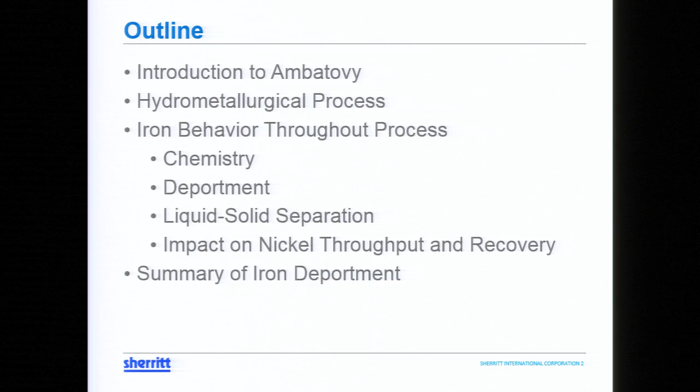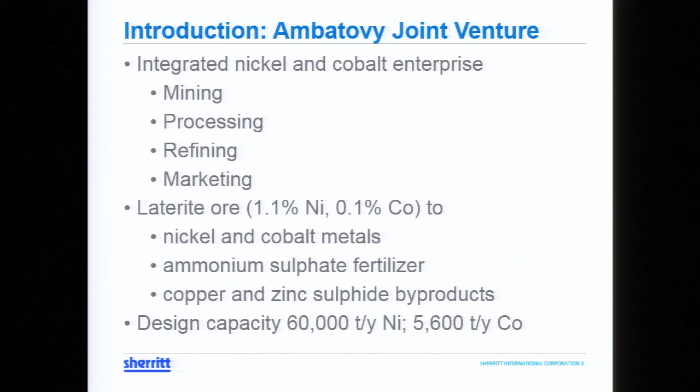The Ambatovy joint venture is the commercial operation. It's an integrated nickel and cobalt enterprise. There's the mine in Madagascar, and the laterite ore is processed through an acid leach flow sheet to produce a mixed sulfide intermediate, which then goes to the refinery adjacent to the pressure acid leach plant. There's also the marketing arm, so it's quite a large enterprise, all in Madagascar. The feed material, which is laterite, has about 1.1% nickel and about 0.1% cobalt. This is processed to recover nickel and cobalt metals and ammonium sulfate fertilizer, as well as copper and zinc sulfide byproducts. Design capacity of the plant is 60,000 tons per year nickel and 5,600 tons per year cobalt.

Just to give you an idea of the location of the plant, this is, of course, Madagascar. The capital city of Antananarivo is marked by this red star. The mine is this yellow square, just north of the town of Moramanga. The actual ore is delivered via a pipeline to the pressure acid leach plant and the refinery on the coast at Toamasina. Ambatovy is fortunate to be in Madagascar, a beautiful country well known for different animal species unique to Madagascar, such as the lemurs.

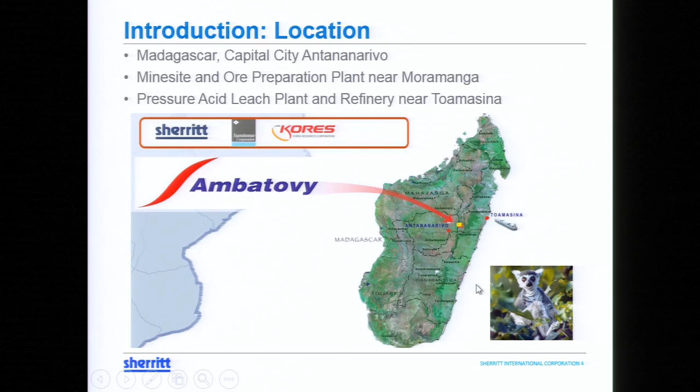The project itself goes back a fair ways. In fact, exploration at the mine site started in about 1960 with Malagasy Service Geologique. Phelps Dodge became involved in 1995 — of course, they're now Freeport-McMoran. Over about 6 years, Phelps Dodge did a lot of resource definition and drilling of the mine site, an environmental assessment, and some engineering studies. I'd say the project had a good start with the Phelps Dodge influence, especially with respect to the environmental and social aspects of the project.

In 2003, Dynatec signed a joint venture with Phelps Dodge to acquire part ownership of the project. Dynatec, for those who don't know, was a short-lived company. It started out as a contract mining company, but Sherritt merged with what was Dynatec International at the time in 1997 — the Sherritt International Consultants branch of Sherritt International merged with this contract mining company called Dynatec, and Dynatec Corporation was formed in 1997. Our mandate at the time was to look for projects to invest in, and Dynatec decided to invest in Ambatovy.

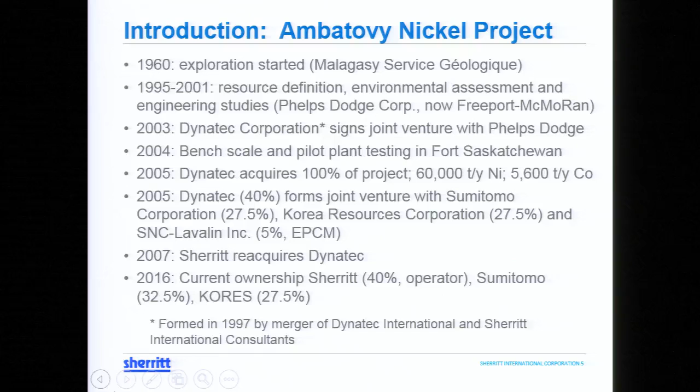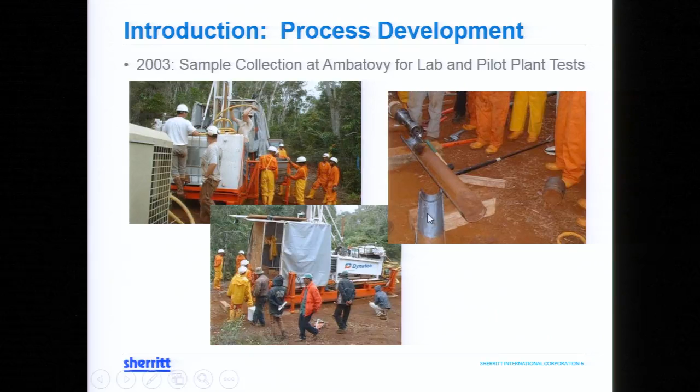So here's the next couple of slides showing a few pictures of the initial work at site. This is some drill rigs collecting 6-inch drill core for the pilot plant test work in Fort Saskatchewan, and here's some pictures of the labs in Fort Saskatchewan during the Ambatovy testing days.

This is a lab batch autoclave, which represents many autoclave steps in the process, which we'll get to later. This is the pilot plant autoclave where the ore was processed, essentially the first step of the chemical processing, high pressure acid leaching. This is the countercurrent decantation wash circuit for recovering nickel and cobalt in the solution, washing it away from the leach residue.

This is the pilot plant sulfide precipitation reactor that we used to make the mixed sulfide intermediate, nickel and cobalt sulfides. This was the solvent extraction circuit that we used when we did the refinery piloting, so it separates zinc and cobalt from the nickel in solution. And this was the first sample of nickel powder that was generated from those solutions - the first sample of Ambatovy nickel metal.

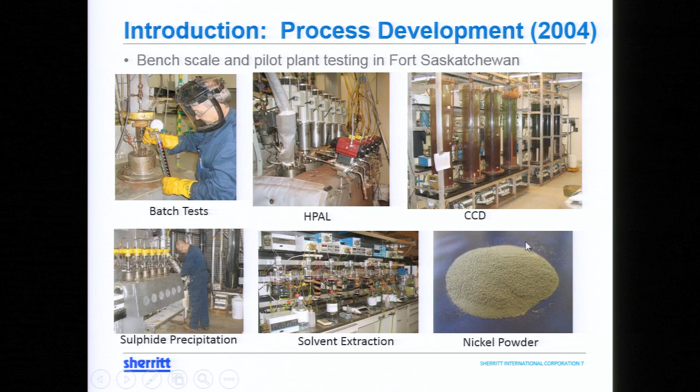Here are a couple of pictures of ore preparation pilot work as well. So in 2008, we did a little bit more piloting. The design work was well underway by then, but there was some interest in looking at different parts of the ore body and also confirming the behavior of the ore in ore preparation. So we ran a small ore preparation pilot plant.

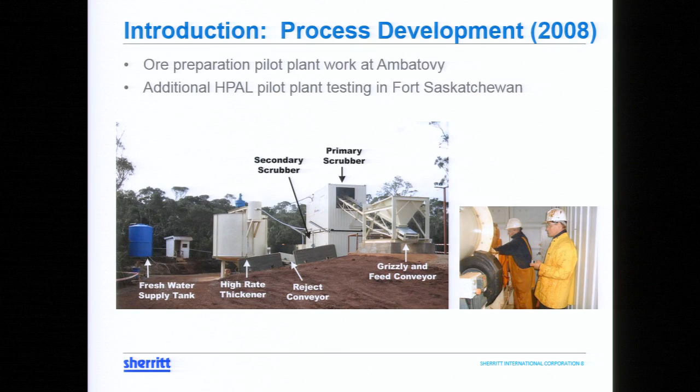So essentially this is the feed. The raw ore would go up this conveyor into a scrubber after it had passed through a grizzly screen. Then there's two scrubbers, one on top of the other here. This is the thickener to thicken the scrubbed ore. And then the ore that was produced in this pilot plant, we shipped a number of tons of it back to Fort Saskatchewan for one more high-pressure acid leach pilot run.

Okay, if we get on to the commercial plant itself, the Ambatovy joint venture, in 2012 was commissioning and startup of the plant, with first nickel being produced in the middle of the year on June 26th.

And then we achieved what was called commercial production approximately 2 years later. That's 70% of design capacity, which would have been 42,000 tons per year nickel. Then early in 2015, we reached production which achieved financial completion for the project, defined as 90% of design capacity for 90 days out of 100. It's a very complicated contract that had to do with financing of the project, but essentially it means a little over 80% production over a 3-month period - essentially 90% of 90%.

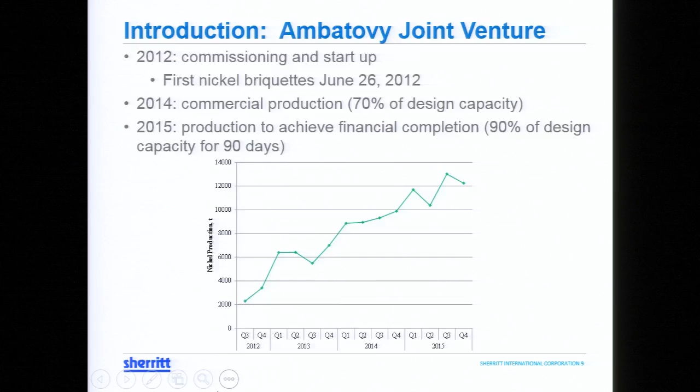Then the ore is thickened once it gets to the site to get it to maximum solids content to minimize the water input to the high pressure acid leach.

So the thickened ore goes to the high pressure acid leach autoclaves where sulfuric acid and steam are supplied. It's a sulfuric acid leach at high temperature, between about 250 and 260 degrees centigrade.

Then that discharged slurry is partially neutralized with limestone, because there's an excess of acid required to get sufficient kinetics for the nickel extraction in the acid leach step. That slurry is then partially neutralized before it goes to the wash circuit, which is a countercurrent decantation circuit with 6 wash thickeners. The washing solution is barren liquor from sulfide precipitation.

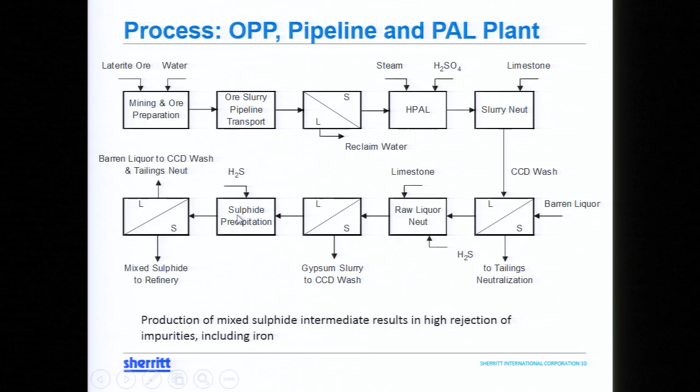Then in the refinery, which is essentially just across the road within the plant site, the mixed sulfide is re-leached in more autoclaves under oxygen pressure. This is essentially an acid leach, but it's quite low acid, something in the range of 5 to 10 grams per liter acid.

So to remove any iron that came over with the mixed sulfides, we have an iron removal step. We add ammonia to increase the pH, a bit of air to oxidize any ferrous iron, and then we end up separating those iron solids from the solution. These go back to the pressure acid leach part of the plant, get washed, and those solids end up with the rest of the tailings.

The solution now has the nickel and cobalt, a little bit of copper, and a little bit of zinc. We go to a copper removal step where it's actually a metathesis reaction. We have zinc sulfide we produce later in the flow sheet, and we bring it back to react with copper in solution. So we have essentially our first byproduct here.

We use an excess of zinc sulfide, so the copper sulfide that's produced in that step still has some zinc sulfide mixed in with it. But that is a saleable product, and it contains the largest part of the copper that was in the laterite ore.

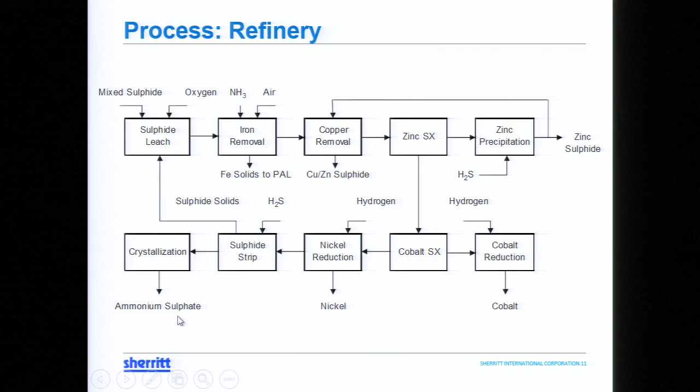The thin slurry is screened at about 0.8 millimeters, so it is suitable for pipeline transport. Also, we get some rejection of things like magnesium, aluminum, and silicon in that screening step.

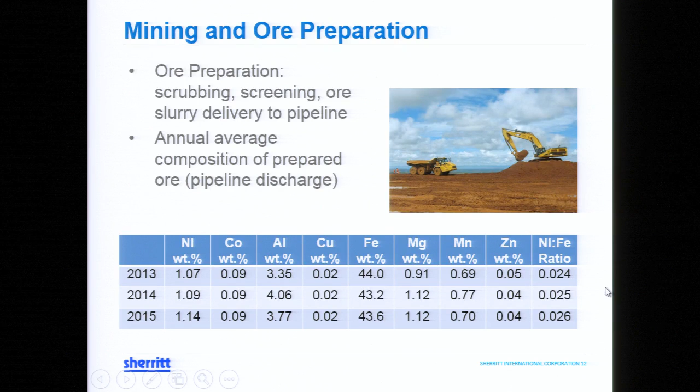So what you see here is the composition of the prepared ore, that's ore that's been through the scrubbing and screening and thickened to about 35% solids to go down the pipeline. These are the average analyses between 2013 and 2015. You can see about 1.1% nickel and 44% iron, so the ratio is about 40 to 1 of iron to nickel in the feed.

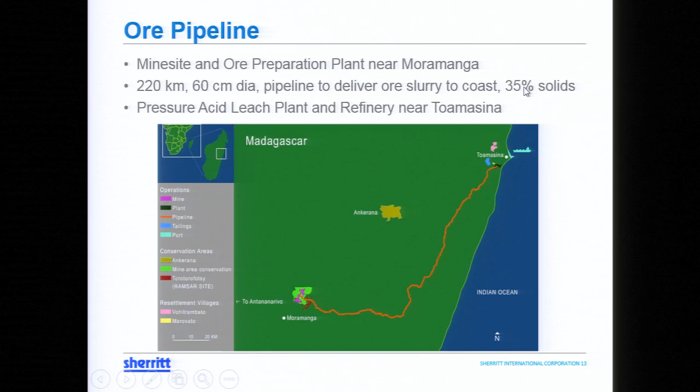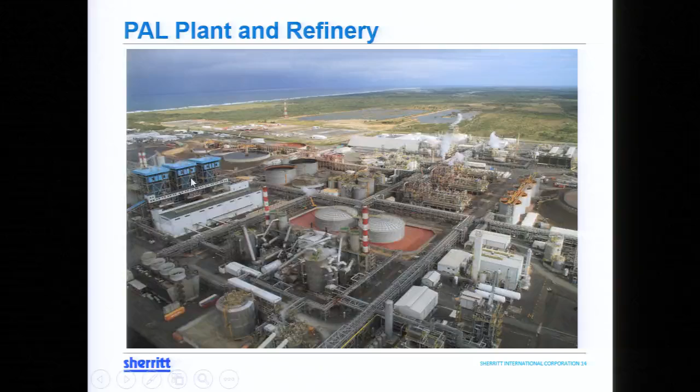So the important part about slurry thickening, the first step in the refinery, is to maximize the solids content of the ore. This is really for economics of the process. We want to minimize acid consumption and steam consumption in that first step, and also maximize nickel and cobalt throughput for the plant. Obviously, the less water, the less volume you have, the more nickel and cobalt you can get through the plant of a given size.

So the design for the plant is 42% solids. We're more typically getting about 38 to 40% solids in startup. This has some impact on iron behavior, because iron extraction in that first step is really dependent upon the solubility of ferric sulfate in that solution. So if there's more solution coming in, more water coming in with the feed, we have more solution coming out. It also means we have higher extraction of ferric iron, because there's more solution per unit solids.

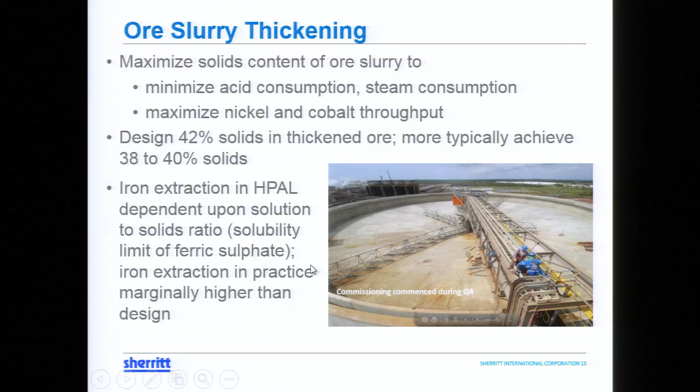So this is a little bit more detail about the high pressure acid leach. Essentially 255 to 260 is generally the target, sometimes closer to 250, but these are generally the target ranges. About 65 to 75 minutes retention time, and a wide range of acid addition, but somewhere around 300 kilos per ton.

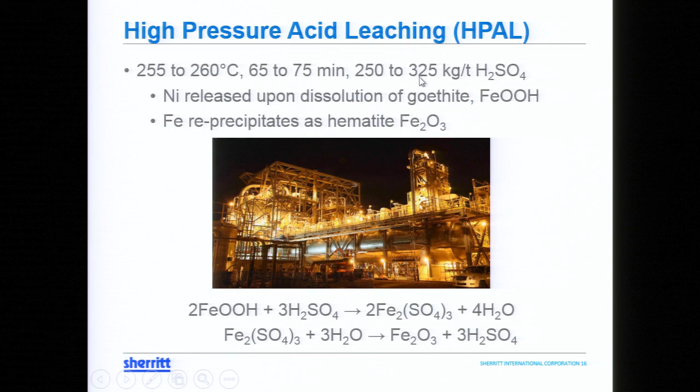The nickel is released from the ore upon dissolution of goethite, because nickel is substituted for iron in the goethite structure. Then that iron is reprecipitated in the autoclaves as hematite, which is very important, because in that reprecipitation, sulfuric acid is released. Without that reprecipitation of iron, the consumption of acid required for the nickel extraction would be significantly higher.

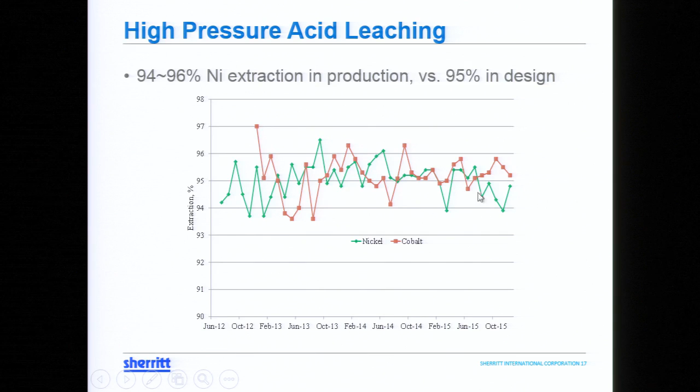Now this shows nickel extraction in the plant since the end of commissioning in June of 2012. Essentially, design nickel extraction, which was for both nickel and cobalt, is 95%. Here we see the nickel and cobalt on monthly averages since startup in 2012. As you can see, typically it's between about 94 and 96% for both metals, so it's been a very successful part of the operation.

Now, I mentioned the net extraction of iron in the high pressure acid leach is dependent upon solubility of ferric sulfate, and that solubility really depends on the temperature in the autoclaves, the retention time, and how much acid is present. Of these things, the temperature and retention time are relatively constant, but the acid addition can be quite variable.

Another aspect of iron extraction is the potential for ferrous iron generation in the autoclaves. Essentially, the ore can be described as reducing if ferrous iron is part of the mix in the product solution. This generally depends on the ratio of oxidants, like manganese dioxide minerals such as asbolane, to reductant components of the feed, such as humic acids.

Any carbon in the feed will react with ferric iron at high temperature in the autoclave step, making carbon dioxide and ferrous sulfate as a byproduct. Once ferrous sulfate forms, that sulfate is tied up with the iron, and there are only very high limits to what that can be. So the more reductant there is in the feed, the more ferrous sulfate there will be. It's not like ferric sulfate, which hits a solubility limit depending on operating conditions. Ferrous sulfate will just keep going up if there's more reductant in the feed.

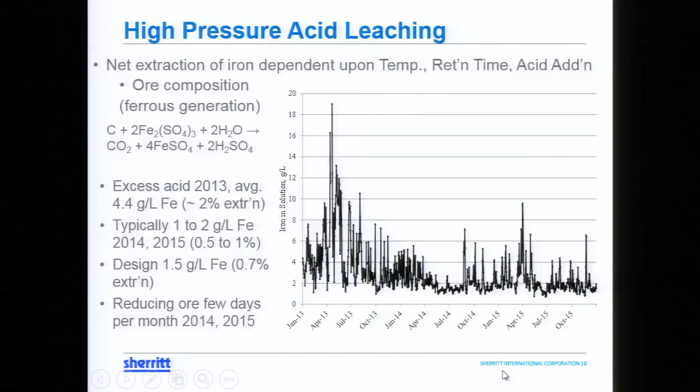Now I'll summarize the behavior of iron throughout PAL. We talked a little about hydrolysis. In the autoclaves, ferric iron can continue to hydrolyze and precipitate through the remainder of the flow sheet. For example, in slurry neutralization, we're adding limestone and increasing the pH, so there is some ferric iron that precipitates from solution here.

We hydrolyze a bit more in the CCD, because the neutralized solids from raw liquor get returned to the CCD for washing, so there's some neutralizing power in those solids. This causes further neutralization in the CCD, so some ferric hydrolyzes there as well. Then in raw liquor neutralization, we deliberately increase the pH to about 3.7, 3.8, which hydrolyzes and precipitates the remainder of the ferric iron in solution. So any iron left in solution after raw liquor neutralization is ferrous iron.

This solution then goes to sulfide precipitation, where a little bit of iron precipitates. Although this step is designed to make sulfides out of nickel and cobalt, with zinc and copper coming along as sulfides, a small fraction of the ferrous iron also precipitates under those conditions.

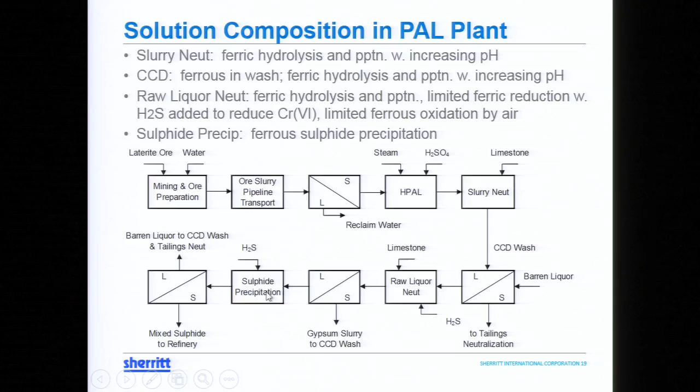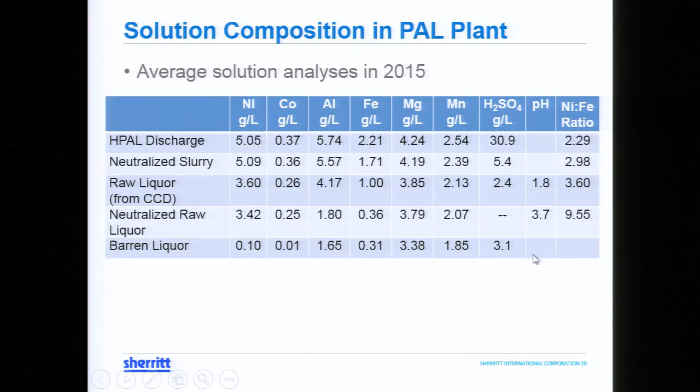There are actually two sources of iron that show up in the mixed sulfide. I talked about ferrous sulfate precipitating to make ferrous sulfide. There's also some carryover of iron-bearing solids that come through with the solutions, from two sources: steam from the flash tanks of the high-pressure acid leach, used to preheat the solution for sulfide precipitation, can carry over leach residue, primarily hematite. Also, the solution from the CCD can have some entrained leach residue with that overflow solution as it comes forward.

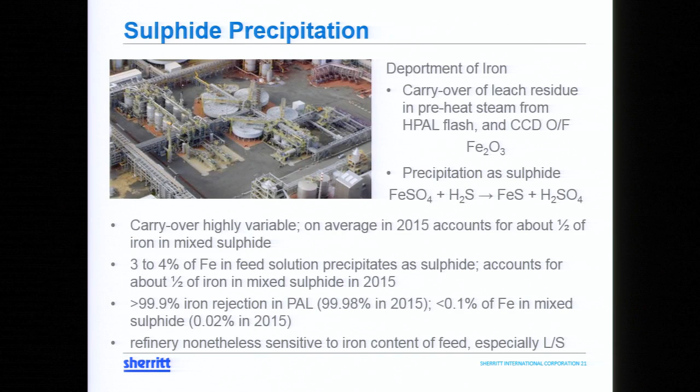Once we look at all the data, it looks like about 3 to 4% of iron in the feed solution is making ferrous sulfide, and the remainder is carryover solids.

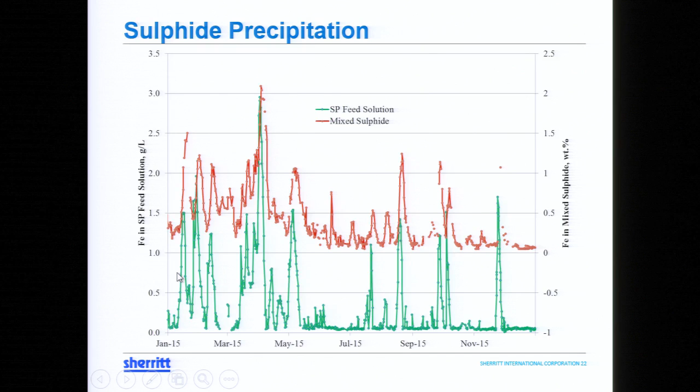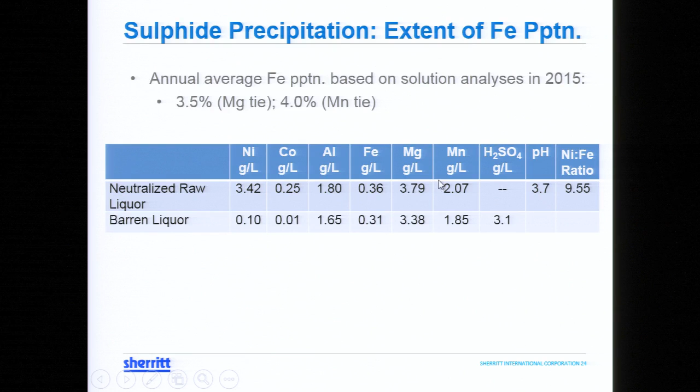This shows that if we use the solution analyses in an iron tie, using either magnesium or manganese, we get very similar numbers.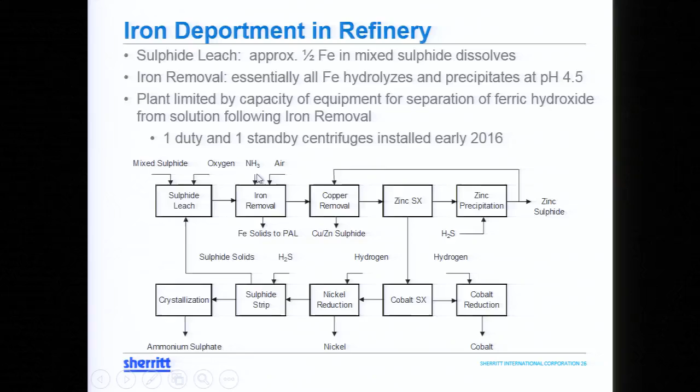This shows iron in solution as we go through the process. In the sulfide leach, it's about 0.34 gram per liter. That's well removed in the iron removal step, down to less than a milligram per liter. So now our nickel to iron ratio is close to 100,000 to 1. Then in copper removal, it essentially stays at about 1 milligram per liter or less. As we go through the plant, there's a little bit of contamination with iron, so we actually get slightly higher concentrations in the downstream solutions.

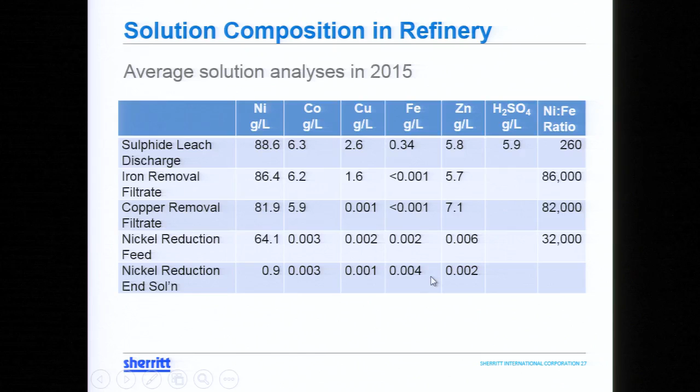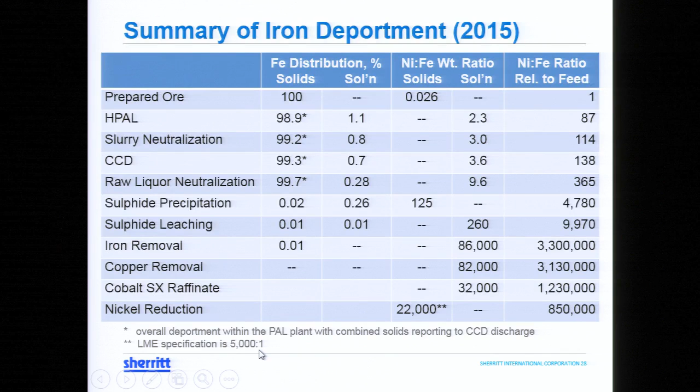This slide shows the overall distribution through the plant. Essentially 99.7% of the iron stays with the leach residue in the pressure acid leach plant, and we've got about a 1,000,000 to 1 ratio of nickel to iron. More like about a 30,000 to 1 ratio of nickel to iron in solution, which is a change compared with the feed of about 1,000,000. And we have no trouble achieving spec for iron content of the nickel. The ratio there is about 22,000 to 1, where LME spec is 5,000. So we've gone from 44% iron, 1.1% nickel, to less than 0.05% iron in the nickel product - an enrichment of about 1,000,000 to 1 in the overall process.

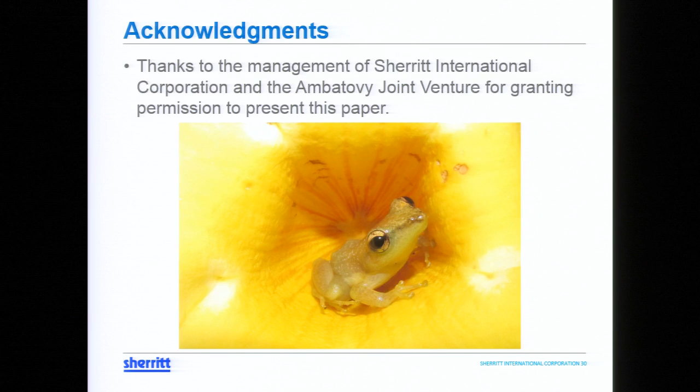Good morning, everyone. I'm Masahiro Tanaka from Coral Bay Nickel Corporation, in Philippines we call CBNC. Today, I will focus on the iron behavior in the high-pressure acid leach process, also called the HPAL process.

At first, I will introduce our CBNC profile. This is the map of the Philippines. CBNC is located in the south part of the Philippines, near the South China Sea. Our product is mixed sulfide, with main composition NiS and CoS. Nickel percentage is 56 to 58%, cobalt 4 to 5%.

We have 2 plants running, 1 and 2. Each plant's capacity is about 11,000 nickel tons and 750 cobalt tons per year, so total capacity is 22,000 nickel tons per year and 1,500 cobalt tons per year. Sumitomo Metal Mining is the principal investor for the operation and control, and the product of CBNC is shipped to Sumitomo Metal Mining for refining to nickel metal.

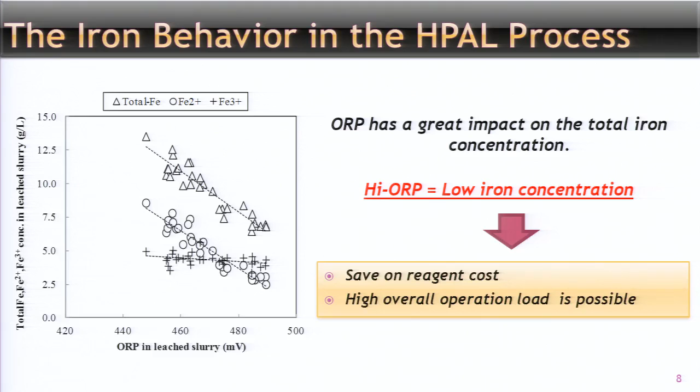Since the chromate needs to be reduced before disposal to the tailing dams, the concentration of Fe2+ has been reduced along with increasing ORP operation. But on the other hand, harmful chromate 6 plus also increases with ORP. High ORP is required to facilitate the production of hematite. However, under such conditions, chromate 6 plus is formed, and this is difficult to remove from the solution. So ORP control is important for saving cost and keeping environmental matters in check.

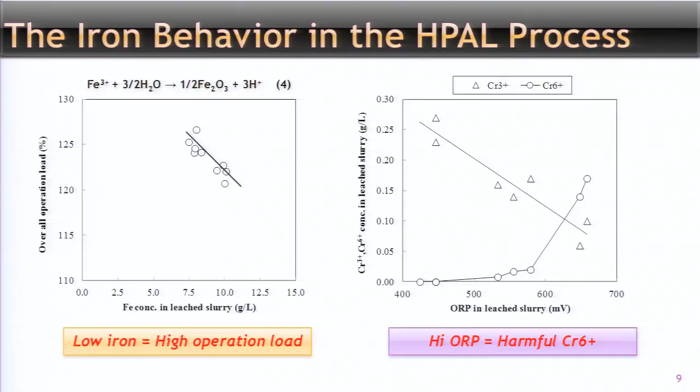Next I will introduce how to control ORP in the HPAL process. First is ore blend control. There are three main types of ore used in CBNC: type A, B, and C. These ores are classified according to their nickel grade. Type A is low-grade nickel, type B is middle-grade, and type C is high-grade nickel ore. The main mineral of these ores is goethite, but the components are different for each type. These ore types greatly influence the acid consumption and ORP for the HPAL process.

They also influence the physical characteristics of the slurry, such as thickening behavior and viscosity. So defining the ore to be mixed and blending the ore is carried out. The ORP and several impurities are monitored and taken into consideration for ore blending. Adjusting the ore blend makes it possible to keep high ORP. However, it's not only the ORP that needs monitoring, other impurities do too. For example, increasing magnesium content increases sulfuric acid consumption, so this must be monitored.

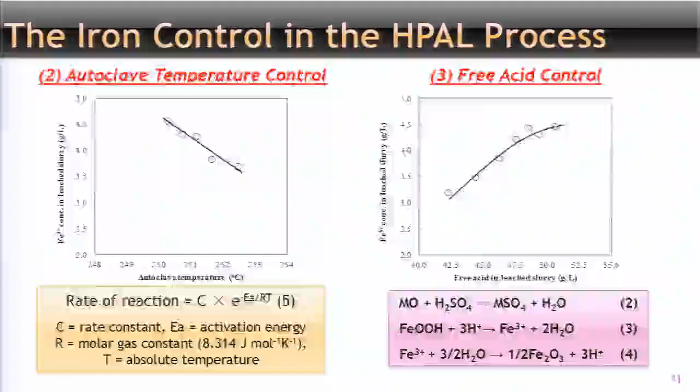Low free acid is better for hematite reaction. However, this is one of the causes of low nickel extraction. So determine the optimized blending rate for nickel, and the hematite reaction is required for optimization.

Finally, I will discuss the additional projects carried out at CBNC. Aside from nickel and cobalt, CBNC invested in a pilot plant for recovery of chromite and scandium to enhance CBNC operations. For the chromite plant, chromite is recovered from the ore feed to the HPAL process. The process involves physical separation to get the product, which is Cr2O3, composed of 41% Cr2O3 with a chromium-to-iron ratio over 1.2.

As for the scandium pilot plant, scandium is recovered from the MS Barren Liquor solution. The process involves recovery of very low concentration scandium from the liquor using chemical reaction to get the final product, Sc2O3, at 99.9% purity.

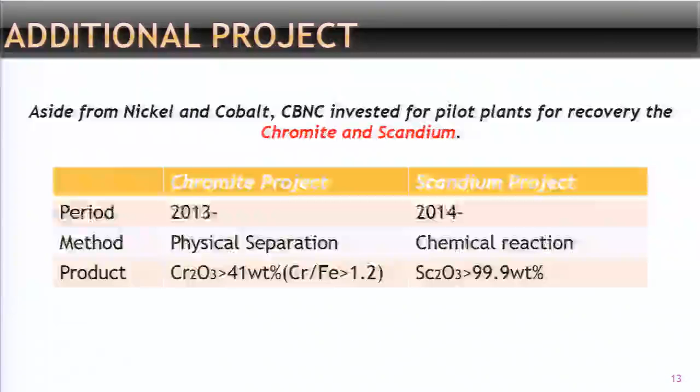Okay, last is the conclusion. Today in my presentation, the effect of iron behavior in the autoclave was reviewed. The keyword is to adjust the ore blend, maintain high temperature conditions, and keep low free acid conditions, which is better for the hematite reaction. If we optimize these keywords, it's possible to save reagent cost and keep a high operation load.

CBNC plant design capacity is just 22,000 nickel tons per year, but we already achieved 24,000 nickel tons per year in 2014. This is a picture after achieving the 24,000 nickel ton per year milestone.

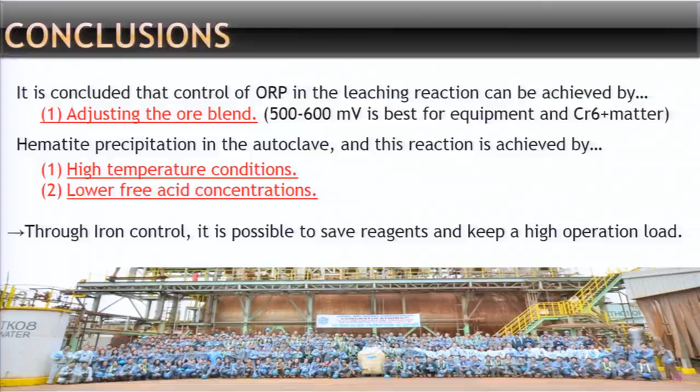Thank you, Masahiro. Very interesting from the Japanese experience. Any questions from the audience? Yes, John.

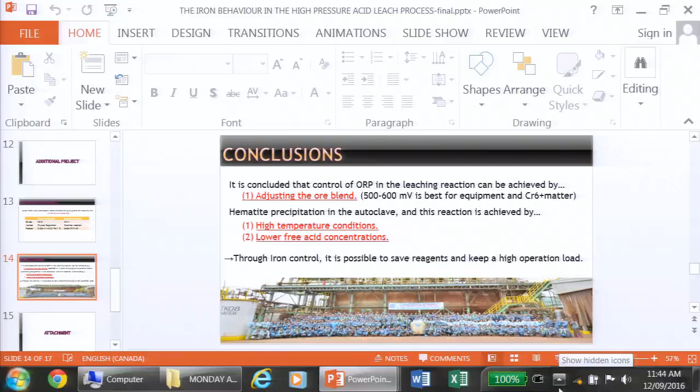We heard in the Sherritt paper that they have to descale their autoclaves once every 7 or 8 months. How often do you descale the autoclaves at Coral Bay? Every half year we proceed with descaling in the autoclave, but it's not a hard scaling. The main scaling composite is CaSO4. In the case of CBNC, it's still manageable scaling.

My second question is, how do you produce scandium commercially, and how much scandium do you produce in a year? Thousands of tons, I assume? For the scandium, how much? Still under discussion. This is still pilot plant scale, but we have a plan to make a bigger pilot plant at another factory.

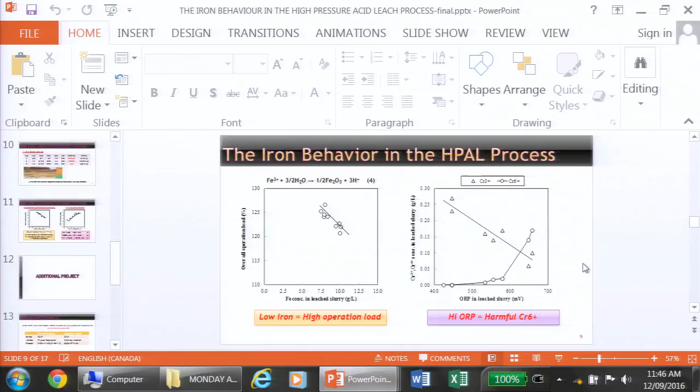And where does the scandium come out in your process? Do you have to reduce the residual iron and then precipitate scandium, or do you precipitate the scandium with the iron? Scandium is recovered from the Barren Liquor solution. This is after the sulfurization solution, so it's a solution containing low nickel and cobalt, and scandium is also at low concentration, ppm order.

Anybody else, Masahiro? Okay, go ahead. Ivan Kraus again, Hydromet Solutions.

I have a question about the zinc removal. I understand how you're doing it, and it's a neat process, but how much nickel do you still co-precipitate with the zinc, and what do you then do with the zinc sulfide product? The zinc sulfide precipitate includes some nickel, but less than 1% nickel loss. The zinc sulfide is disposed to tailing dams, sent to final neutralization, and after neutralization discharged to the tailing dams.

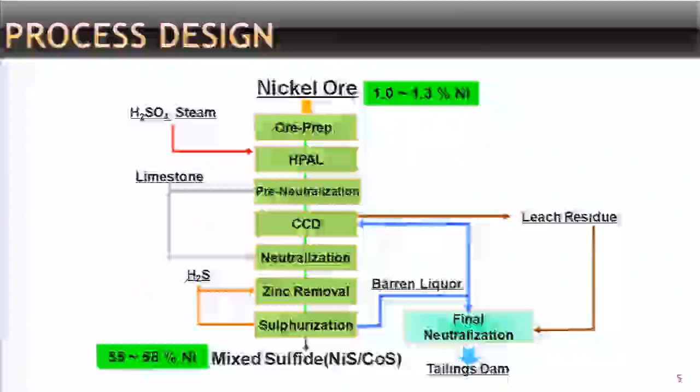Yes, one more question. I noticed that you take your HPAL solution and neutralize it before the CCD circuit. Some operations, I believe, do the CCD separation first and then neutralize the solution. Did you examine both options, and why did you choose to do the neutralization before the CCD circuit?

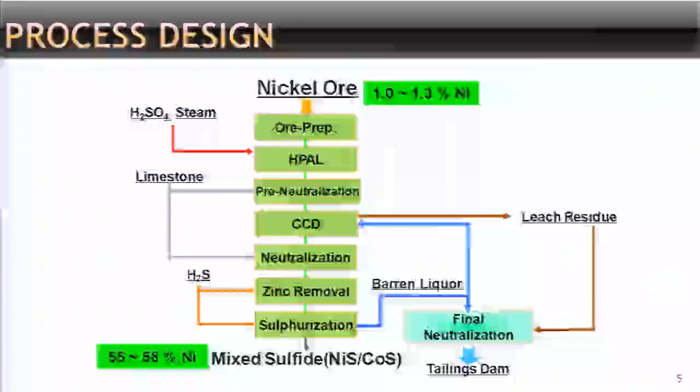The pre-neutralization circuit's main purpose is to remove iron 3-plus by injecting limestone. But after the pre-neutralization, the solution still has some remaining iron 3-plus and other impurities, so we have an additional neutralization circuit for removal of the remaining impurities.

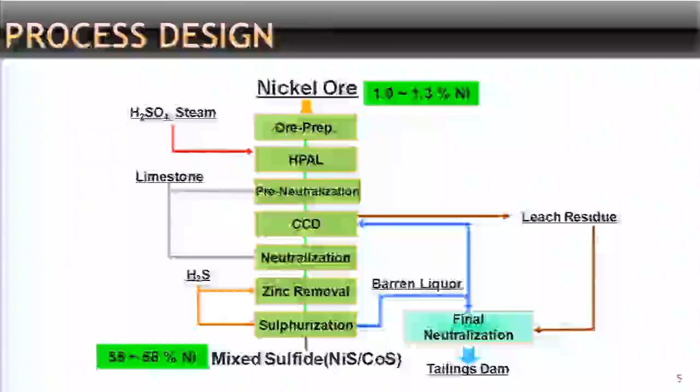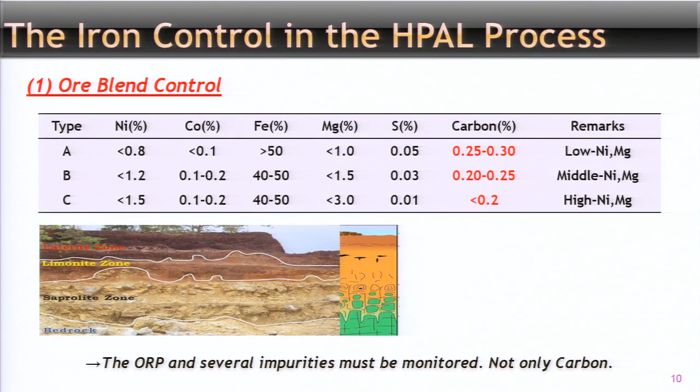Each autoclave's acid consumption and neutralization reagent consumption depend on... No, I understand, where do you measure is the question. Or at the stockpile, and the redox for example, where do you make this measurement? We have many portions, but we will focus on the ore prep circuit, thickener underflow slurry.

But this is one of the causes of delayed reaction, so we also monitor at the ore prep stockpile portion.

So the 500 millivolt threshold you mentioned, is this measurement before the autoclave or after? After the autoclave. So there must be a huge lag time between when you measure and when you send the message back to control and readjust the feed conditions. So how effective is this strategy? We always monitor our ore preparation thickener underflow at 30%, not only the leach solution ORP, before sending to the HPAL circuit.

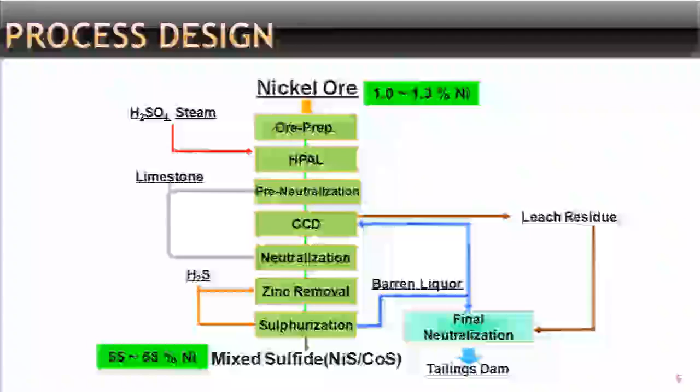Okay. Any last word? No. So thank you very much, Masahiro.